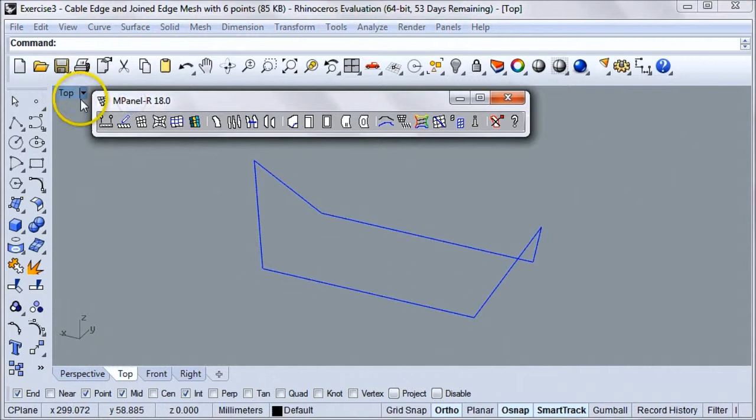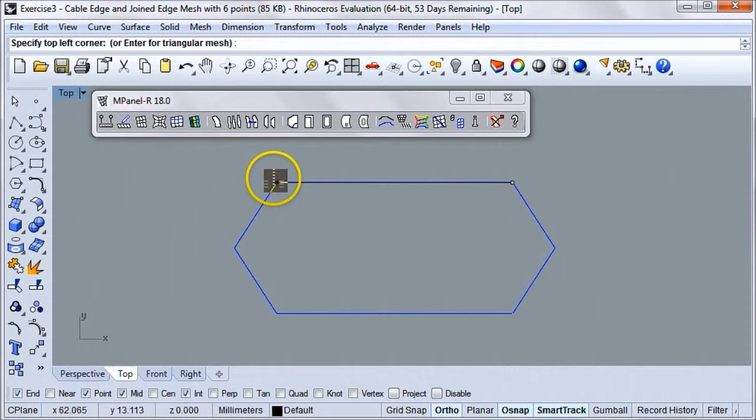On the MPanel Model Builder drop-down menu, we'll select Draw Corner Mesh. Then we'll select the 4 corners in order, starting with the bottom left corner, going to the bottom right corner, skipping the middle corner, going to the top right corner, and top left corner. Now we have our mesh.

The next thing we'll do is turn on the mesh nodes in Rhino. We do that by clicking the Rhino Points On tool, selecting the mesh, and clicking Enter. Now we can see the nodes, and what we're going to do is grab a node near the middle of the mesh and snap it to that middle point that we skipped earlier when we were making the mesh. When we do this, we also want to make sure that Rhino Osnap is on so that we know that we're snapping exactly to that point.

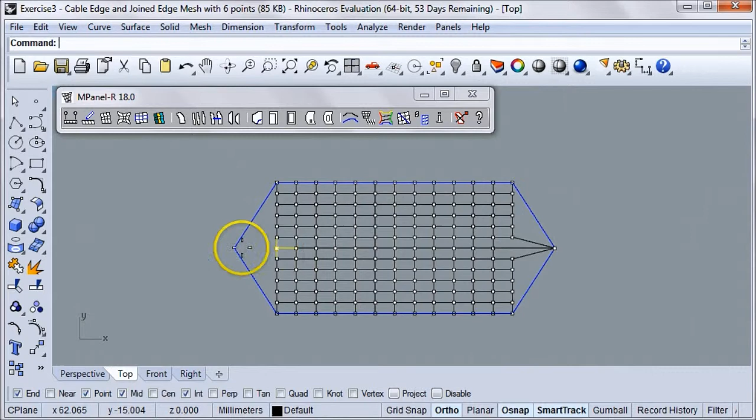Let's do the same thing on the other side. What we've done here is pull the edges of the mesh out and attach them to these 2 corners.

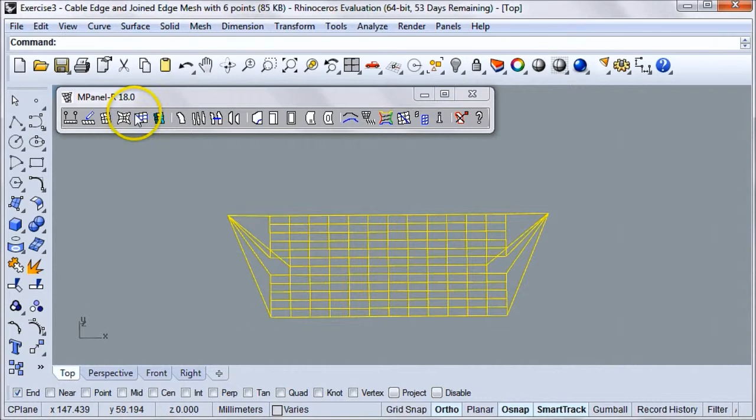Now what we're going to do is form-find the correct shape for the mesh. First, we'll turn off the mesh nodes by hitting the Escape key. Then we'll select the 3D polyline frame and the mesh and run the Relax Cable Edge Meshes tool. This will add cables to all the mesh edges and determine the natural force balance shape for the mesh.

So there's our new relaxed mesh.

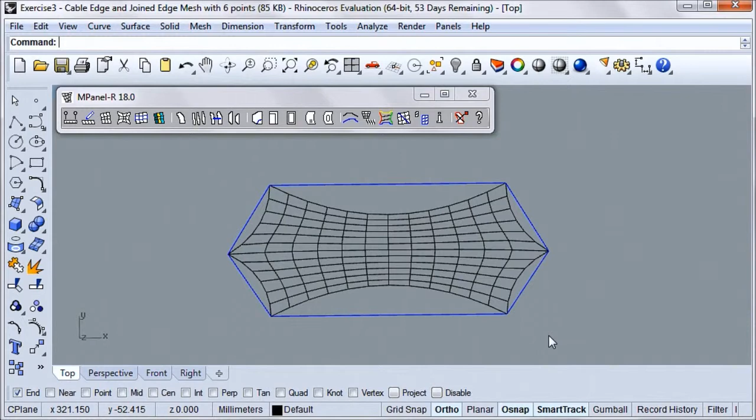But sometimes you'll want to model a frame with more than one mesh, because that gives you more control over the model and allows you to adjust the meshes individually.

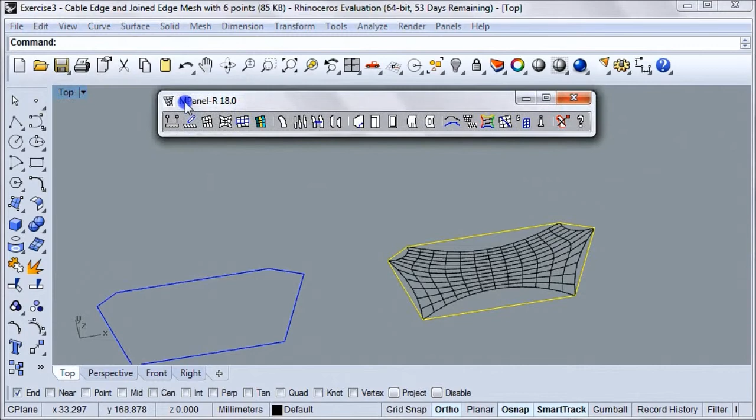In order to do that, let's first make a copy of our original polyline frame. Let's put it right over here. We can get enough space. And now let's just revert back to top view so we can see exactly what we're working with here. And let's move in on this new polyline frame.

And what we're going to do is put 2 meshes on it. So in order to do that, we'll go back to the model builder, we'll click on Draw Corner Mesh, and then instead of the 4 corners that we selected last time, we're going to start with the bottom left corner.

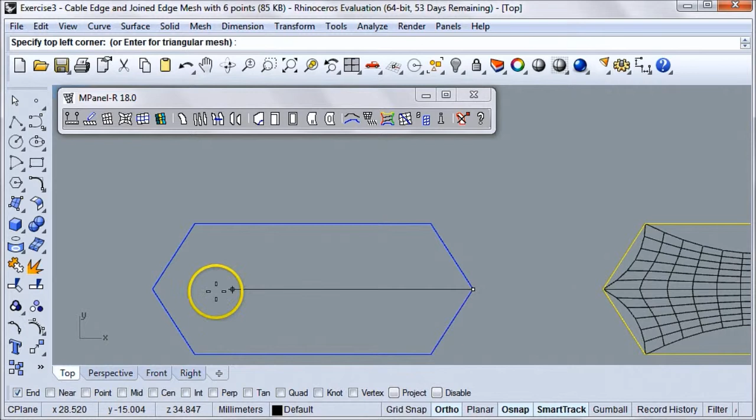Bottom right corner, and we're going to go up to the corner that we skipped in the middle on the right here, and then across to the other corner that we skipped in the middle. And those are our 2 top corners. So there we have a mesh.

Now we've meshed the bottom half of our frame. But before we mesh the top half, let's change the color of this mesh to something else so that we can tell the meshes apart when we do the next mesh.

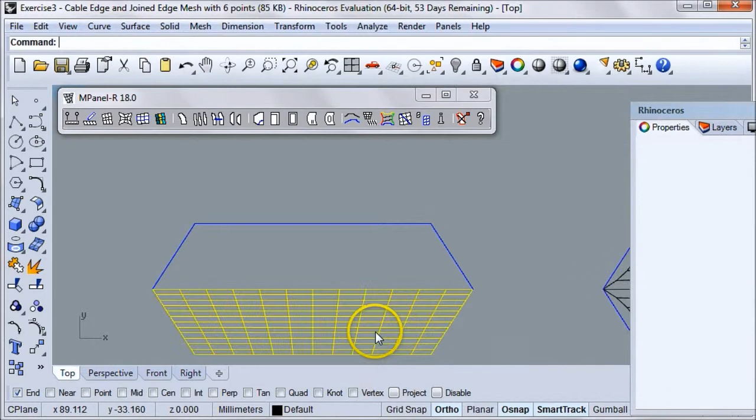Let's select this, and under Properties here, we can change this display color. Let's try red. So now we have a red mesh.

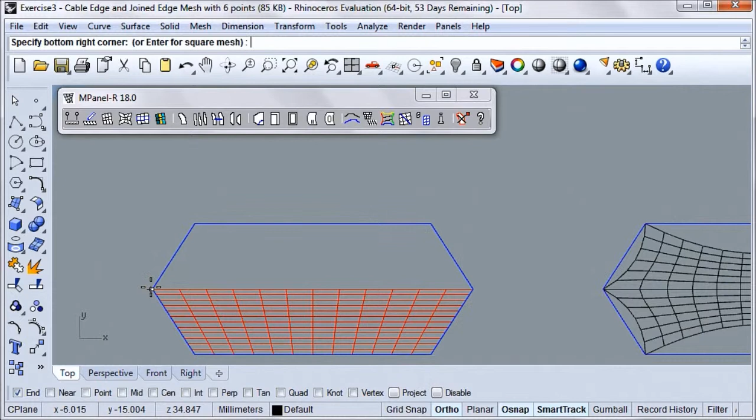Now we're going to do the same thing to the top half of the frame. So we'll go back to the model builder, click Draw Corner Mesh, and this time we'll select the left middle corner as our bottom point. Go across to the right, top, top, and now we have a mesh for the top half of our frame.

So let's take a look at what we have now. We have these 2 meshes here, making a kind of tent.

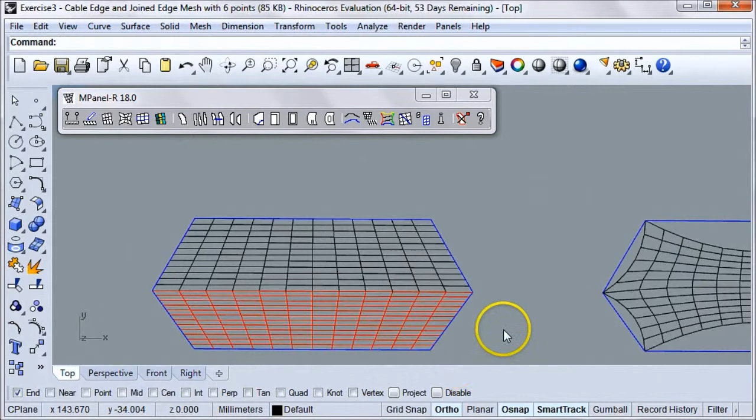So what we're going to do is relax these meshes with the Relax Joined Edge Meshes tool. When we use this tool, MPanel will interpret any meshes which are joined at their edges as part of a continuous mesh. So there is a smooth ridge to this model, just as if it were a single mesh.

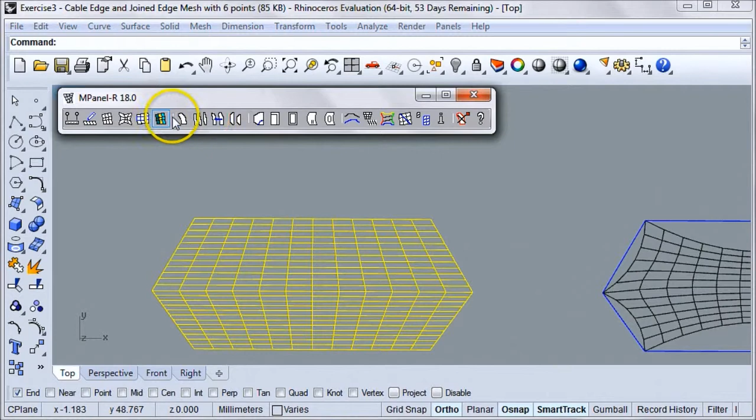So let's select the meshes and the polyline frame and run the Relax Joined Edge Meshes tool, which is found right here. Now MPanel colors the newly relaxed meshes the same, they're both black, so I'm going to select this bottom mesh and change it back to red so we can tell it apart from the top one.

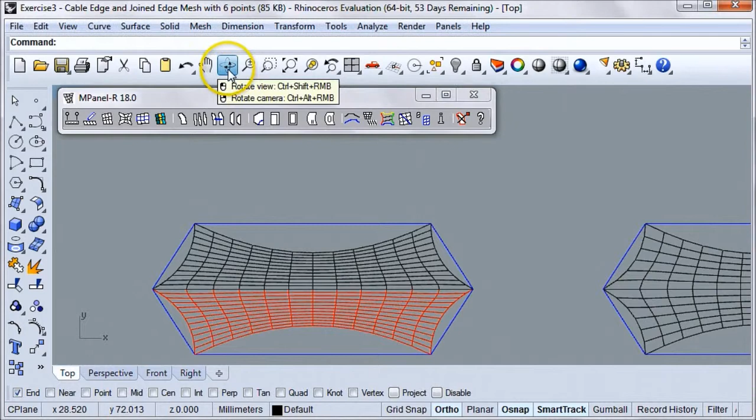There we go. Notice that the curvature of this joined edge mesh is actually exactly the same as the curvature of the single mesh that we created earlier, right here. We have the same surface, but it's made of 1 mesh on this model and 2 meshes on this model.

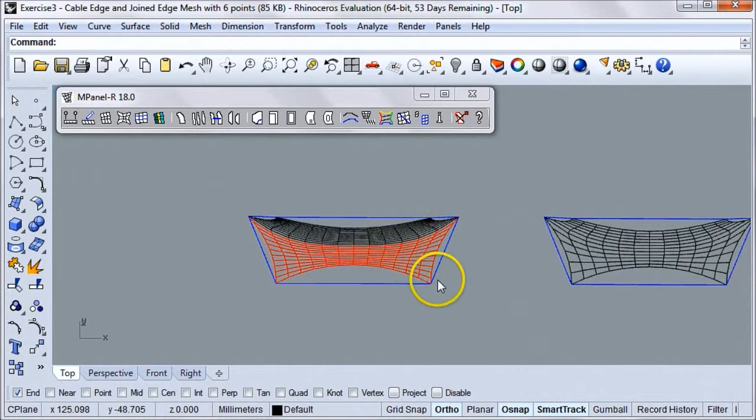Another thing we could do is relax the double mesh model with the Cable Edge Mesh Relax tool. In that case, MPanel would put a cable on each mesh edge, including the internal edge, which will give us a sharp ridge line where the cable runs. Sometimes that's what we want. So let's make a copy of this and try that.

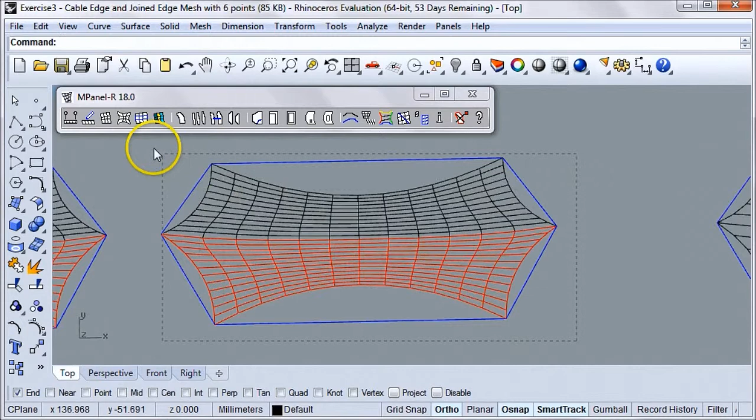What we'll do is, let's first straighten this out a little bit, zoom in, and then select the 3D polyline frame and the mesh, and run the Cable Edge Meshes Relax tool.

If we delete our old mesh and take a look at this, we can see that we now have a fairly sharp ridge along the top, where the mesh used to be smooth, and that's because MPanel has added a cable there.

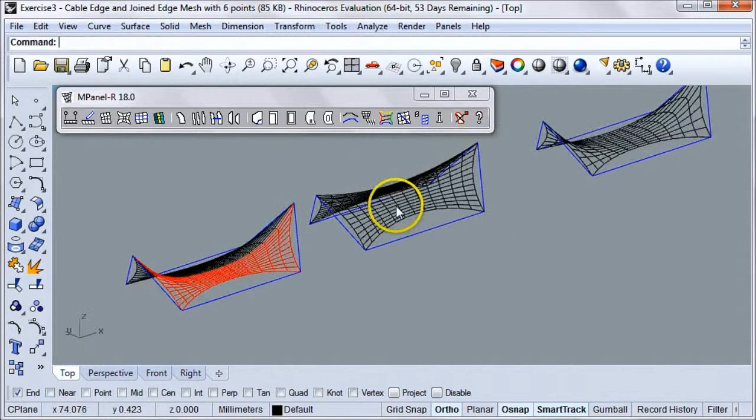We're now finished with our exercise, and we've learned how to model a 6-point frame with a single mesh, a double mesh, and a cable edge mesh.